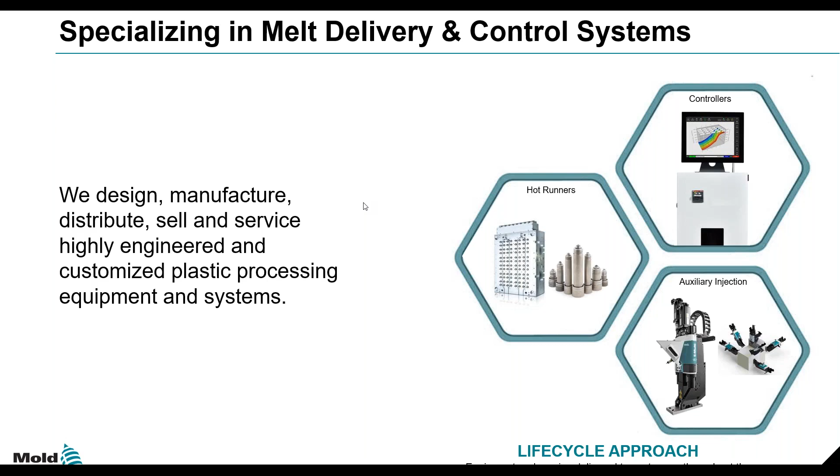So a little bit about MoldMasters and what we do. We design and manufacture hot runner systems - that's our core principal business. Associated with the hot runner systems are, of course, temperature controllers. We also provide auxiliary injection units, which we call an e-Multi.

MoldMasters global presence: we were founded over 50 years ago, 1963 to be exact. We do business in approximately 100 countries globally. We have over 2,000 employees. On a daily basis, we manufacture over 500 nozzles. MoldMasters has always been very strong in terms of our intellectual property and our technology and developing new technologies, and today we have over 900 patents associated with hot runner systems and hot runner technology.

Over the years, we've done many applications - 150,000 different molding applications. Globally, we have 4 manufacturing locations. They're located in Canada, China, Germany, and the UK. Globally, we have 15 service centers with 140 global field service technicians to support our customers.

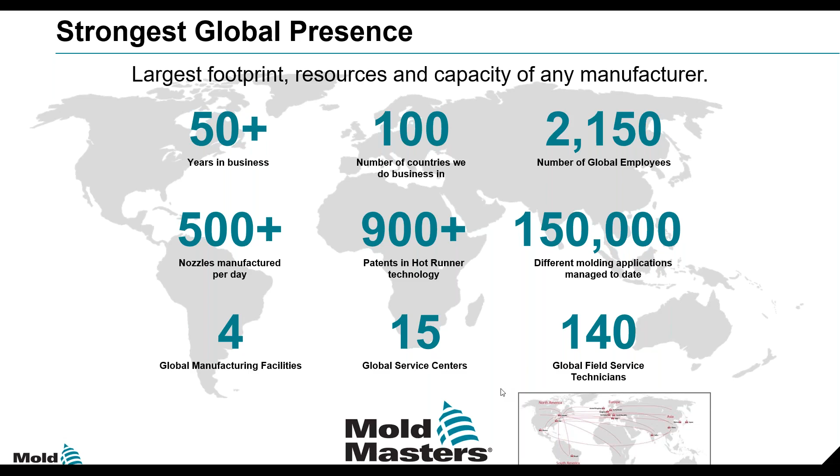So what is a hot runner system? Hot runner technology was introduced over 50 years ago and really revolutionized the whole injection molding process. A hot runner system conveys molten plastic from the machine nozzle and has a system of melt channels that are thermally controlled by electrical heaters and thermocouples to deliver the melt, the plastic, to various different cavities. Today's molds can have 1 cavity or up to 192 nozzles, depending on the parts being manufactured, their size, materials, etc.

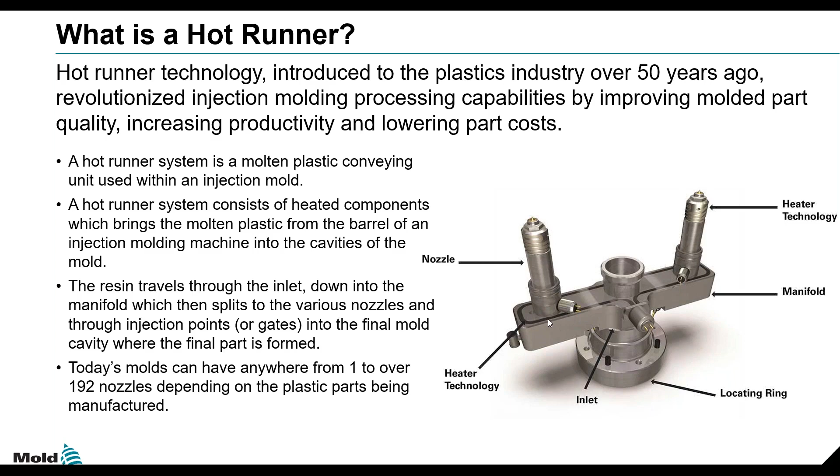This image here just shows you a very simple 2-drop or 2-cavity, 2-nozzle hot runner system. Some of the components that we can see are the inlet pointing down to the floor here, and then we have 2 nozzles that will feed the plastic into the cavities. The plastic comes in and goes through a manifold and then enters into the nozzles to feed the cavities.

So the hot runner system is going to be integrated into the mold, and the hot runner system is customized to match that mold design. Then the mold with the hot runner system is installed into the injection molding machine. Along with the hot runner system, there will be a controller, a temperature controller, and that controller may also include some auxiliary control as well.

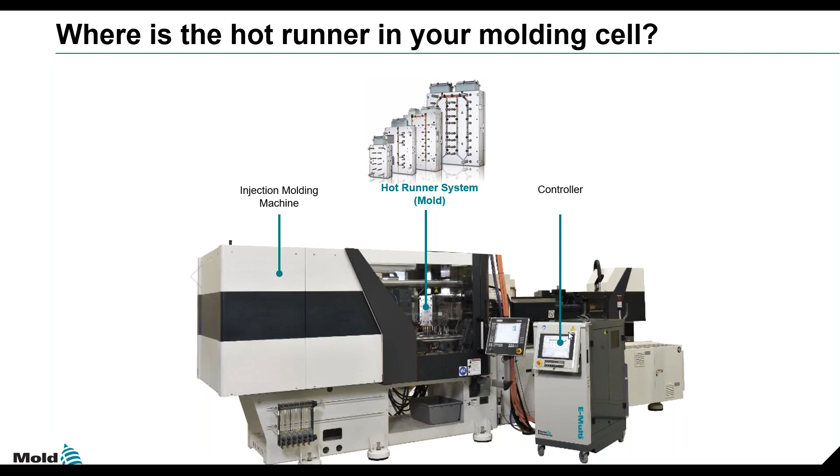So, hot runners versus cold runners. Hot runners came into being - MoldMasters, as we say, were founded over 50 years ago. The oil crisis of the 1970s really promoted hot runner systems. People were being more careful about the energy they were using, and more careful with the use of petrochemically derived products so that they weren't disposing of plastics as easily. Some of the benefits they were able to achieve out of hot runner systems were faster cycle times and less waste.

Here you can see a cold runner, and this cold runner has to be cut away from the molded parts. This plastic may, in some applications, be reprocessed; in other applications, it may have been thrown out in the past. So the hot runner system will eliminate this cold runner and automatically provide parts that are detached, with no cold runner attached to them. It's a degree of automation being built into the mold.

It consumes less energy, requires less capital equipment. You don't need regrind - regrind is always a variable in your process if you're using it. If you eliminate that, then you have a more robust process. It's highly automated, a degree of automation, and it improves part quality - 100% virgin material being used, with better process control.

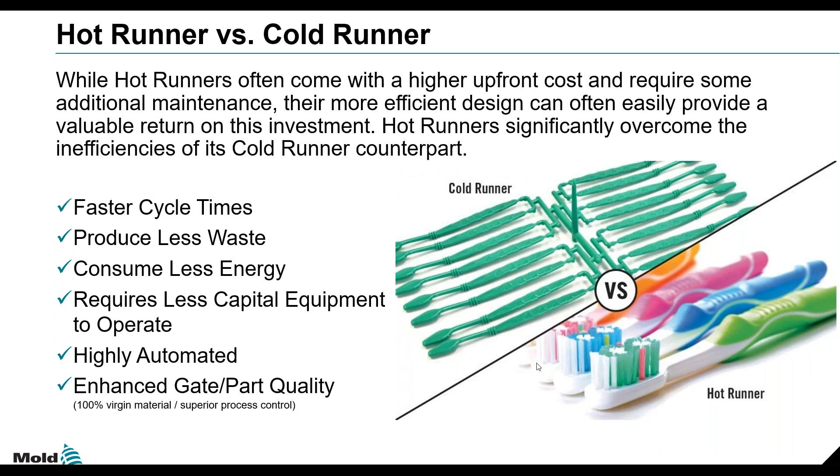Today, MoldMasters serves a variety of different industries. Up in the top here, we're showing the different industries that we serve, providing consumer goods, electronics, medical, personal care, technical components, caps, closures, packaging, white goods, and automotive.

To serve each of those, we have a variety of products. I'm not going to go down through the list, but these consist of different hot runner systems that are specifically geared towards certain applications and certain projects. So we can help select the most appropriate hot runner product based on the application.

We have advanced gating methods, including our AccuValve and others. A valve gate will have a valve pin that needs to be actuated to open and close the gate, so we have mechanisms to control that, to help manage that process.

We mentioned earlier temperature controllers. So we have a variety of temperature controllers, and we'll explain a few of those today. Depending on the number of zones, the size of the mold, there are other features as well that can be included into the temperature controller.

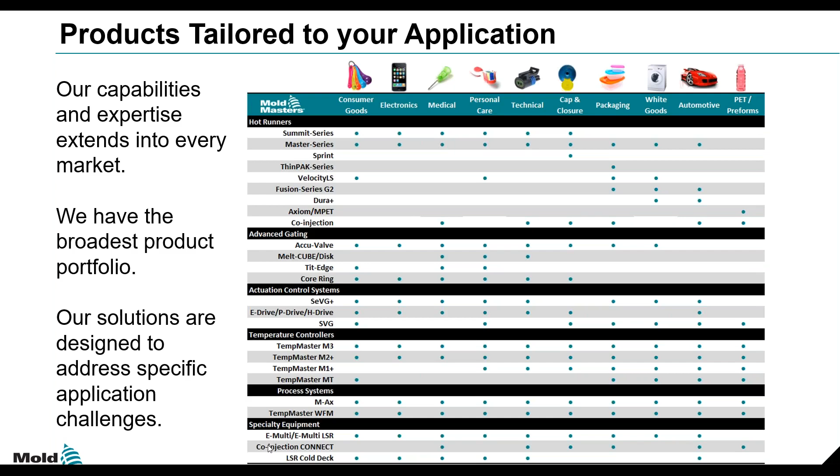We have other specialty equipment. I mentioned the EMulti, our injection unit, and we also have a co-injection process and product.

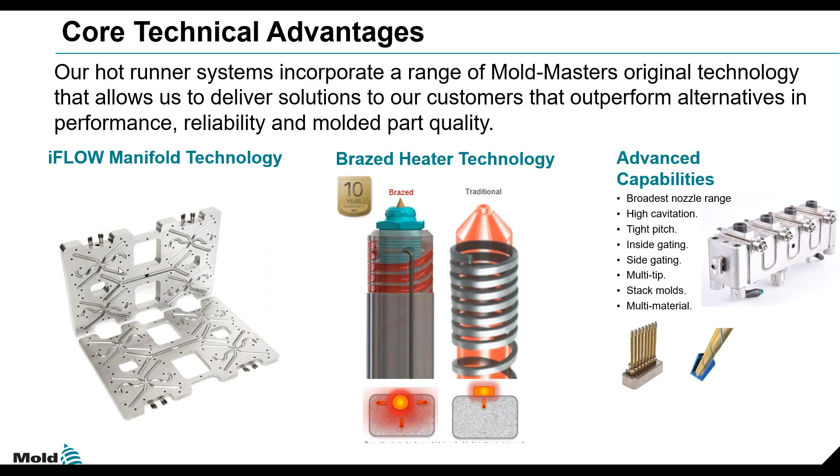Some of our core technologies: our IFlow Manifold technology is a technique that we use to manufacture manifolds. Our heater brazing is a core product or core feature of MoldMasters hot runner systems. And then we have advanced capabilities for different types of applications - high cavitation, tight pitch where nozzles are very closely positioned, stack molds, multi-material - a whole range of more advanced technologies using hot runner systems.

The core technology is the brazed heating technology. So when we build a hot runner system or a nozzle, that heater is being brazed into the nozzle. What that means is several things. One is that when heat is generated in that heater element, it's immediately being transferred into the thing it's trying to heat up - it's metallurgically fused to the nozzle, it's a part of it.

When we put a heater onto a nozzle, every nozzle that we make is going to have the same heater in exactly the same position, which gives us consistency of performance from drop to drop. By brazing that heater in there and ensuring that heat is being drawn away from that heater, what that does is it extends the life of the heater. So it's very unusual for a MoldMasters nozzle to burn out - not impossible, but very unusual, a much lower incidence than conventional heaters that are not brazed into position.

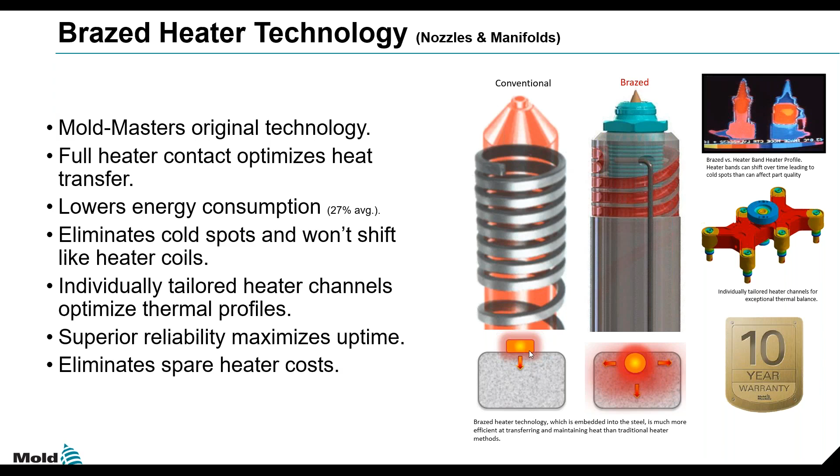Our IFlow Manifold is a MoldMasters technology that has been around for over 30 years. The concept is that we take two pieces of steel and mill the pattern that we want the plastic to flow through - we mill it into the surfaces on the two faces of that manifold. Then we braze them together, again metallurgically fusing those two pieces together, very accurately aligned.

So we can put in different runner geometry. We can also select the sizes of the runners and change them at different locations as we wish. We're not limited by a gun drill drilling in a straight line, so this gives us tremendous flexibility with many benefits in processing.

Again, those manifolds are going to have heaters brazed into them so that you have long life and flexibility from a design perspective - we can position those heaters where we need to in order to achieve the optimum thermal profile within our manifolds.

The IFlow manifold also has features where we can put in different levels. So we have milled features where we mill the runner, but we can also gun drill some channels into that manifold as well. So we have different levels - this manifold that you see here actually has two different levels of runner channels built in.

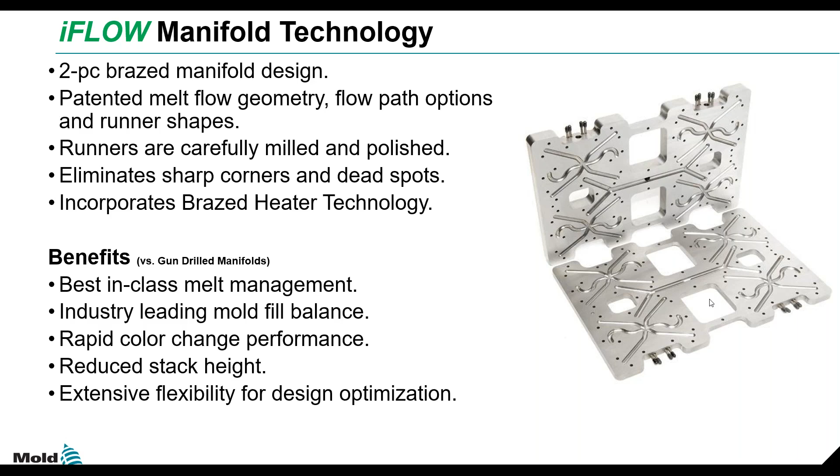Some of the gating methods - open gate versus valve gate. The valve gate is kind of obvious in that mechanically you move a valve pin and you now can flow plastic through the gate. Non-valve gating relies on cooling to close the gate. There are different designs according to the type of gate quality, the type of material being molded, and the gate quality that you want at the end is a major factor.

Some of the gating methods we would have with non-valve gating would be a torpedo gate. Here we see what we call an E-type torpedo. Again, there are different options depending on the desired gate appearance and the material being molded.

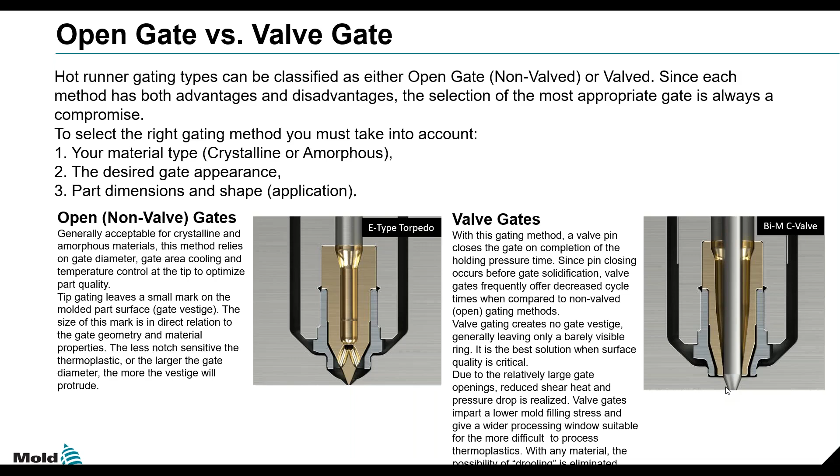Valve gating, we have different options based on part size, based on material being molded, and the quality of gate that is required. Our premium gating method, our premium valve gate, we call AccuValve. AccuValve features different types of gating methods with different benefits, suitable for different applications. Our most common is our AccuValve MX. The AccuValve CX is designed for excellent color change. And our AccuValve GX features a component that actually goes through into the cavity and forms part of the cavity surface.

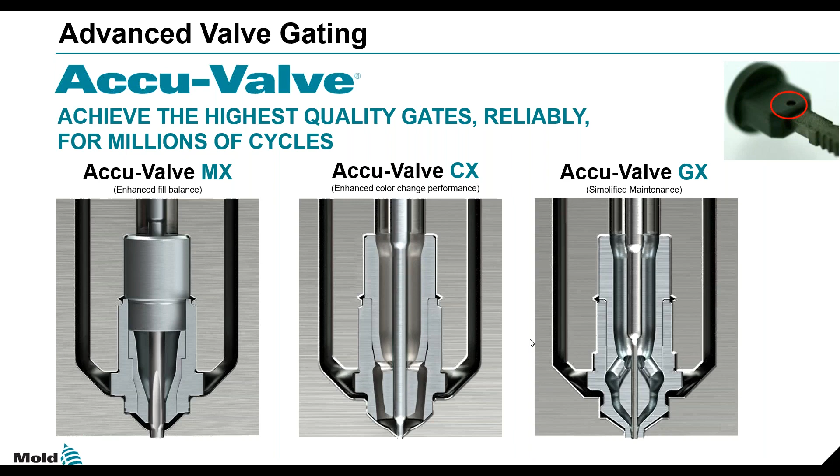In order to achieve the highest quality gates, it requires a fine tolerance between the valve pin and the gate. With these gating methods, the mold maker needs to achieve that tolerance on the gate finish. With the AccuValve GX, MoldMasters takes care of not just the valve pin, but also the finish in the interfacing component, right down into the cavity steel. So it is simplified maintenance, easily replaceable gate steel, and easy integration into the mold.

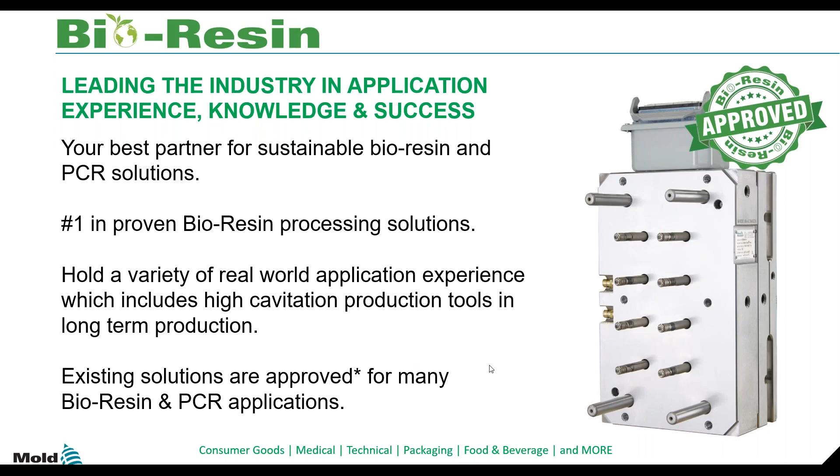Bioresin - we've heard a lot about bioresin. MoldMasters has been making applications for many years, using various different types of material that is more environmentally friendly. Bioresins have had a lot of focus in recent years, and MoldMasters technology lends itself to these types of applications. Some of these materials are more thermally sensitive. They have a narrower process window, and we have systems that are more suited to these types of materials. So we have wide experience on a wide variety of bioresins. That means degradable materials, compostable materials, and PCR, post-consumer regrind or recycled materials, which are reducing the carbon footprint of products and attractive to many applications.

Stack molds - this is one of the more advanced technologies. Over 35 years, we've been supplying systems for stack molds and hot halves for stack molds. One of the questions about a stack mold is how do you get the melt into the center section of the mold? A stack mold is going to have two molding faces. So within the mold, when the mold opens, you have two parting lines. This means that the hot runner system is actually in the center of the mold and moves away. The center section is moving as the mold opens. So we have different techniques to get the plastic from the machine nozzle into the hot runner system.

The most common is the sprue bar, which we show here. We also have another feature, another type of design, which we call a valve-to-valve. What the valve-to-valve does is it eliminates this sprue bar. So when the mold opens, you don't have an obstruction going across the first parting line. Instead, you have two valve gates that feed into each other. You open up, you shut off between each face of the valves, and you pass plastic across the parting line, then close the gates, one closing into the other. So when the mold opens, you have a fully clear opening.

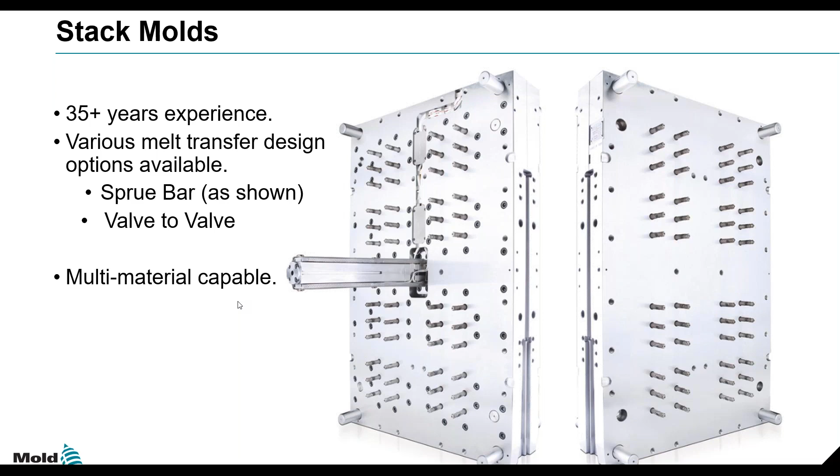Multi-material capability - we make systems that use different materials. Injection molding one material onto one face, and then a rotation may occur within the mold, or a mechanism may open up a different cavity in the mold. So you make a part that has two different materials, one molded on top of the other. And doing that in a stack mold makes it even more complex.

Another advanced feature is side gating. We have different options for side gating. One is our melt cube EVO. Here we see a melt cube, and on the side of it we can see the feed points that are going to feed into the cavities. The cavities are positioned so the mold can open and close, and the part is fed in on the side. Here we have another 4 cavities on the other side, so you're getting multiple cavities aligned in rows for simplicity and for getting more density into the mold, more cavities for a given mold space.

Our melt cube is similar, except now the tip is angled at a slight angle. So if you don't have an exact vertical wall, or another feature that you want to mold a gate into, we can accommodate that. What you don't see here are all the runners built in so we have a balanced flow path to each gate. If you want more detail on this product, search MoldMasters on YouTube and you'll see a variety of videos that go into this type of technology in more detail.

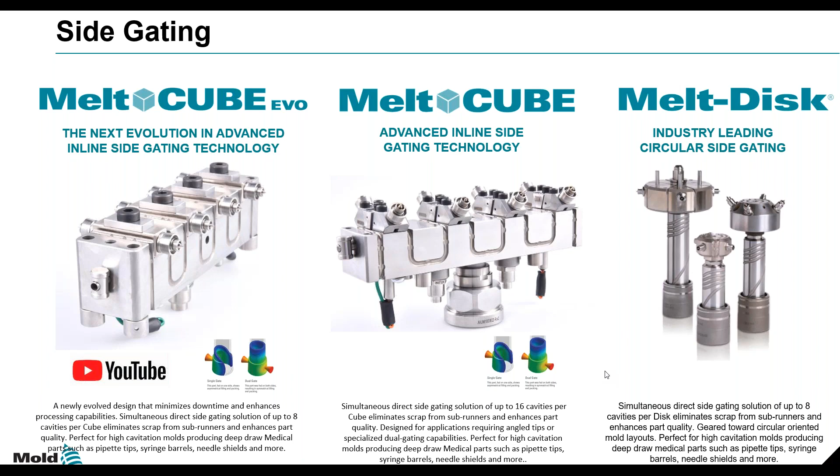So these are what we call more advanced technologies. We would be very pleased to review any applications, though some thought needs to go into assessing the application and verifying that it's valid and suitable for this type of gating method. We'd be happy to review any applications where that might be considered.

Specialized dual gate design: we have a special melt cube that allows us to gate into a part on both sides. Here we can see a part, and we're gating in from two sides. The reason we want to do that is to reduce the possibility of core deflection. If we're making a part and gate it into one side, the plastic has to flow around the core pin, and as it flows up along the core, it goes up faster on one side than the other. That's a problem if this core pin is not...

located at the open end. If you have an open end in the part, parts like blood vials, you can't shut off on the top of the core pin. So if your plastic is moving up on one side, you may cause that core pin to deflect and get pushed over. If you were doing it with a cold runner, you'd make the cold runner come in on both sides of the cavity. So how do you do that with a hot runner system? What we do is we come in and feed from two different sides.

Let me go back a slide. Here, the secret in how we do it is we have two inlets into each of these melt cubes. One inlet would feed in - we're looking at it from the parting line side here - but on the other side, plastic is being fed in at this location and distributed to give uniform flow to each of these four cavities. We will have another inlet here that would feed into these four cavities. So if we had 8 cavities, here we just show 4, but if we had another 4 cavities, we would use 3 of these melt cubes.

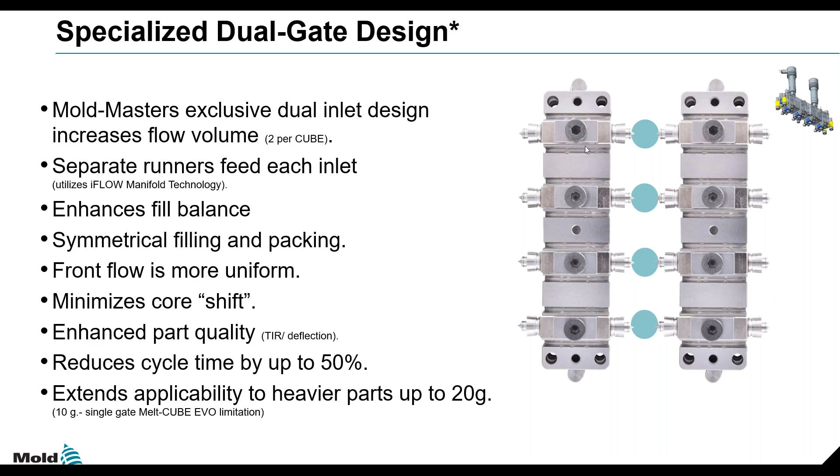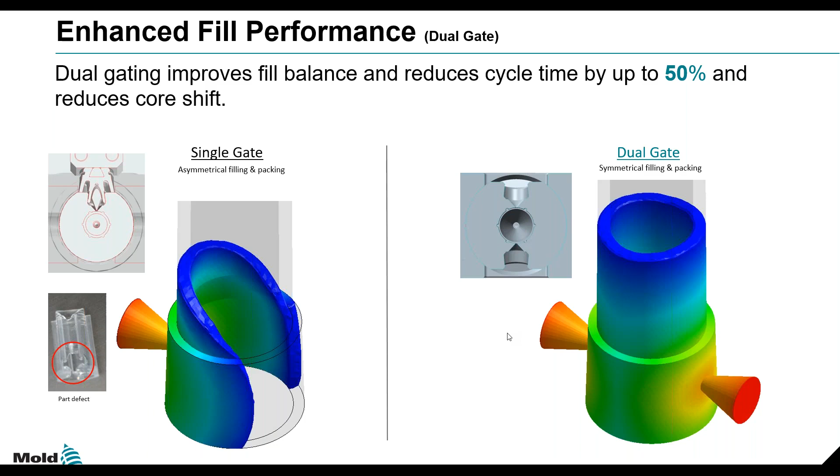That gives us identical balance and solves the problem of how we feed in from both sides. That gives us excellent balance, excellent control of filling, and that translates into straightness on parts such as pipettes, where straightness is a critical concern.

At the beginning of the introduction, we saw a reference to a Mold-Masters hot runner system that Plastek uses. This is what we call a Tit-Edge system, and here we see 2 gates. Here's how this gating method actually operates: we're going to gate into the side of the part that we see here. On the left-hand side, we can see an example of the gate witness.

So there is a witness mark where this gate is positioned, feeding into the side of the part. Here we generate a cold slug. As the mold opens, it takes the part away, it degates, cuts this off with a clean gate appearance. And then on the next cycle, we push in that cold slug, we remelt it, and we allow the part to fill. So we have a fully automatic degating process, good gate quality, and no moving parts other than the mold, of course.

We don't have any shut-off mechanism in here. This is all controlled thermally. This gives us excellent color change, excellent balance, and that is the gating method being used. And the system that Doug showed has 36 nozzles, so it's a 72 cavity mold.

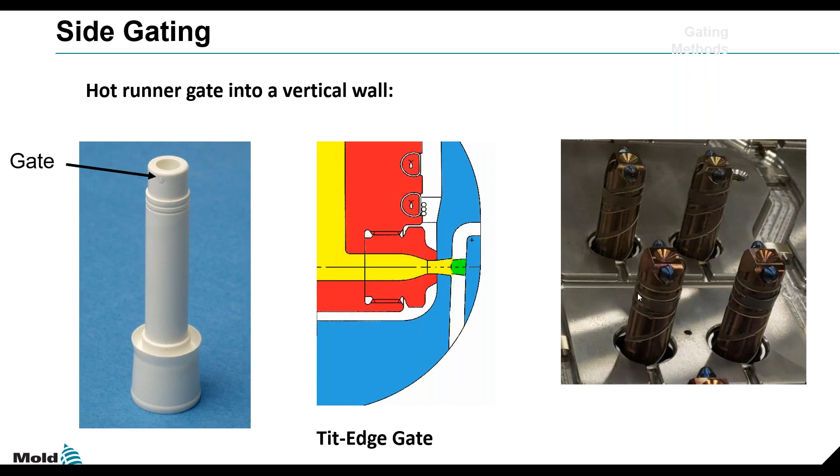Sequential gating will be used where we want to control, we're not going to open all the gates at the same time and fill simultaneously. If I have a large part with multiple gates, I open all those gates and start filling. The flow front between two gates is going to meet in the middle, and you're going to see a witness mark on the molded part.

What sequential valve gating does is it allows us to control the opening time, the opening position of the pin. So you don't open them all at the same time. So if you wanted to move the weld line or knit line in one direction, you open up one gate first, and then slightly later, you open up the second gate. So you can control the position of that knit line between the two gates.

If you have a large part and you want to avoid witness lines between gates, you open one gate and take the flow front past the second gate. After it is past the second gate, you open up that second gate and now push that flow front further along, perhaps to another gate. So sequential valve gating can help to eliminate witness lines or knit lines, or at least help you to position them to where you want them, to less objectionable positions.

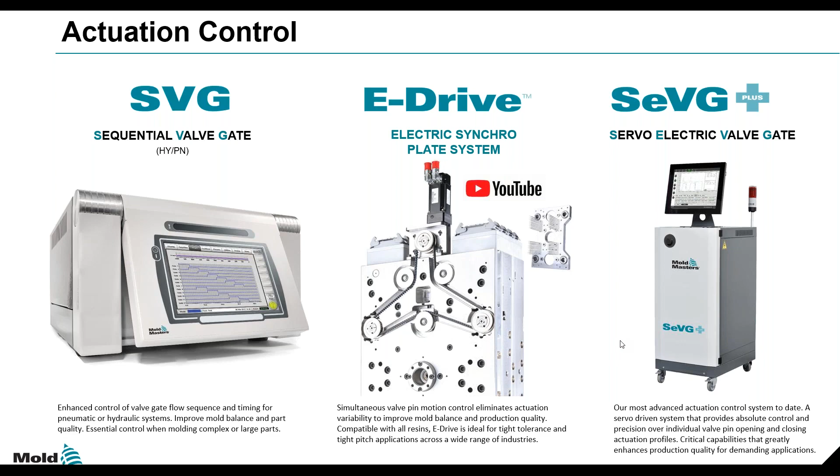Again, this can be combined with the sequential mechanism to control the timing of the valve gates. Servo control gives us control not just of the time when we're going to open the gate, but also the position of the pin as the pin opens. We can control its position, and that can influence the gate quality and appearance of the gate. We can also control the speed that the pin is closing, for example. And again, this can have an influence on the quality of the molded parts.

So the E-Drive, this is an example showing quite a large mold. It also features our manifold technology. So this mold is an 80 cavity mold. So that's a little bit unusual. Here we have a servo motor that drives this belt around these ball screws and idler pulleys, so that we have a plate in there that is going to move up and down to open and close the gates.

So here we see this plate. So we can position the pins nice and close together on this plate. So our cavities, we're getting more cavities out of the mold. But you're not going to be able to get individual actuators to move these pins. So we put them onto this plate.

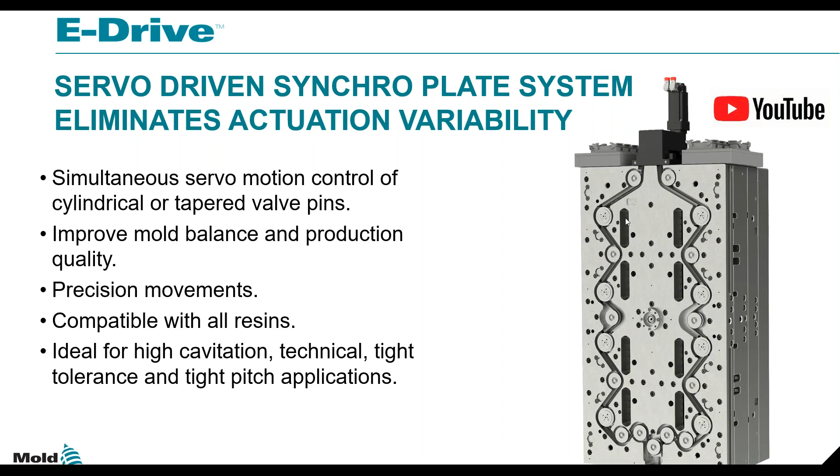And here we have, this is half of the mold, so we have 40 of these pins on this mold. And actually these slots allow you to access those pins within the mold. So if you damage a pin, you don't have to take apart the whole mold. You can gain access to it from the back. So this plate, this actuation gives us very uniform movement of all the pins all together, which helps with part fill and balance.

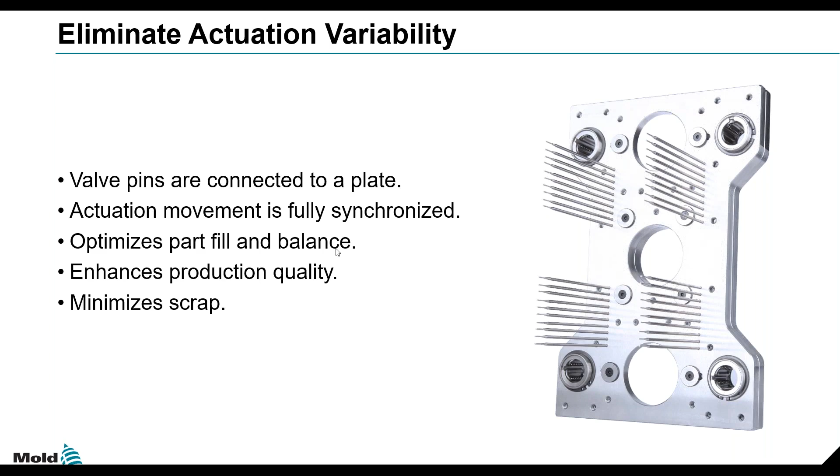So what happens if we damage a cavity? I've got an 80 cavity mold, a big mold, and I've got a cavity that is dimensionally incorrect, or I've damaged the cavity. Can I shut off, or how do I shut off one cavity?

This is a mechanism that we refer to as our Mag-Pin technology. The servo plate contains this mechanism with the valve pins.

In order to shut off a cavity, we don't stop molding, we drop the temperature in the cavity we want to shut off. As the temperature of the material in the nozzle drops, the plastic solidifies and holds onto that valve pin. Now, if we actuate the valve pin, the plate moves, but here we have a magnet feature that lets go of this valve pin holder.

So this plate can still move up and down, but this pin is not going to move because we've dropped the temperature on that nozzle. That is the Mag-Pin technology. When I want to get this pin to move again, I just turn back on that nozzle, and now this magnet will pull the pin up and down. All the pins each have their own individual magnet, so any individual cavity can be deactivated just by dropping the temperature on that drop location.

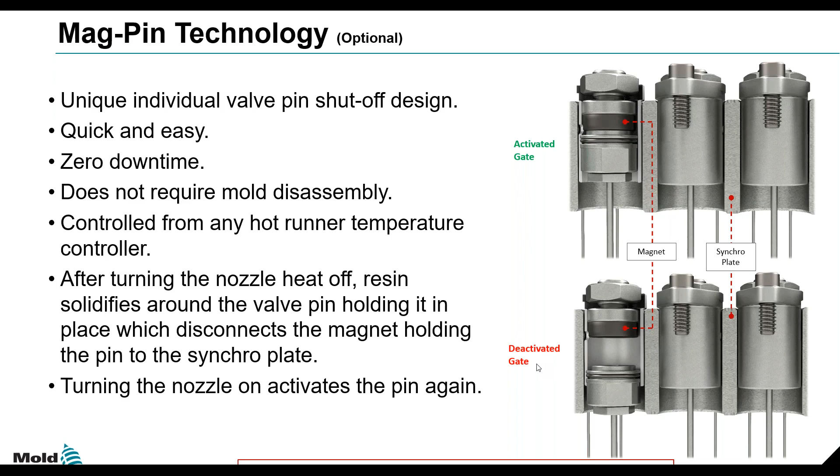SeVG Plus, this is our Servo Electric valve gate. This is a servo-driven system, giving us absolute precise control over individual gates. It allows us to individually adjust each valve pin, so we can change our stroke, we can change our speed. In a family mold, you may require different features on different parts, different timing of opening of different pins, so this gives you tremendous flexibility across the mold.

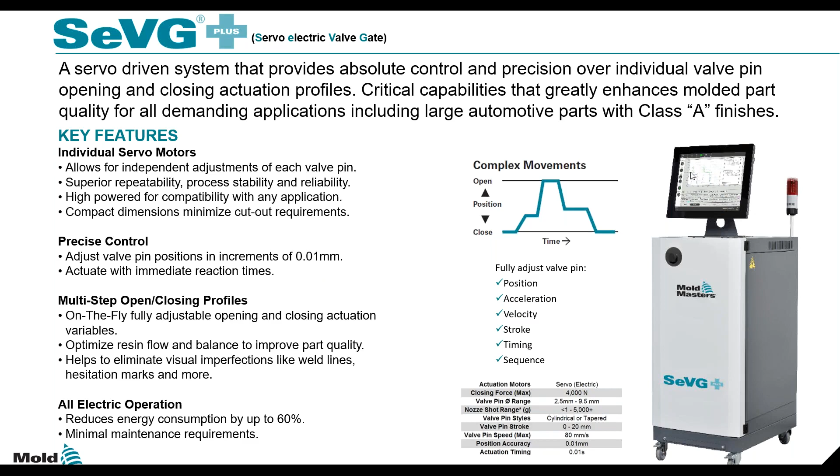You can adjust the valve pin positions in increments of 0.01 millimeters and make adjustments on the fly with this. The screen is easy to use and very user-friendly.

The servo motors have traditionally been a challenge because of their size. This is something we've been working on, and MoldMasters has introduced a new servo motor that is 48% smaller stack height than conventional servo motors. The footprint, the size of it otherwise, is about the same size as a standard hydraulic cylinder, so just over 4 inches square. But the stack height has been reduced by 48% and still incorporates water cooling channels that are necessary to maintain the temperature of the servo motor.

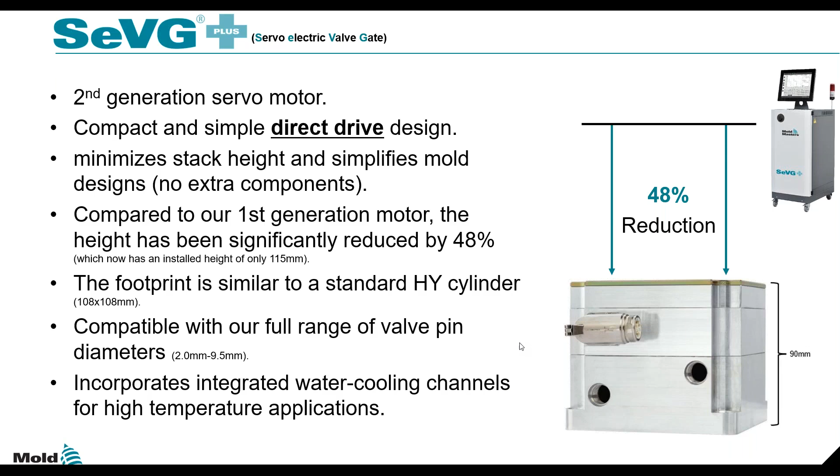Temperature controllers. MoldMasters offers a range of temperature controllers depending on the size of your molds and the number of zones that you're going to need.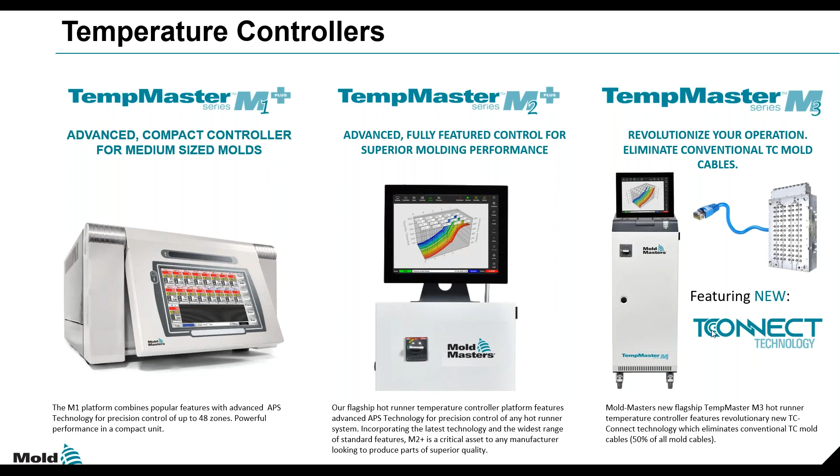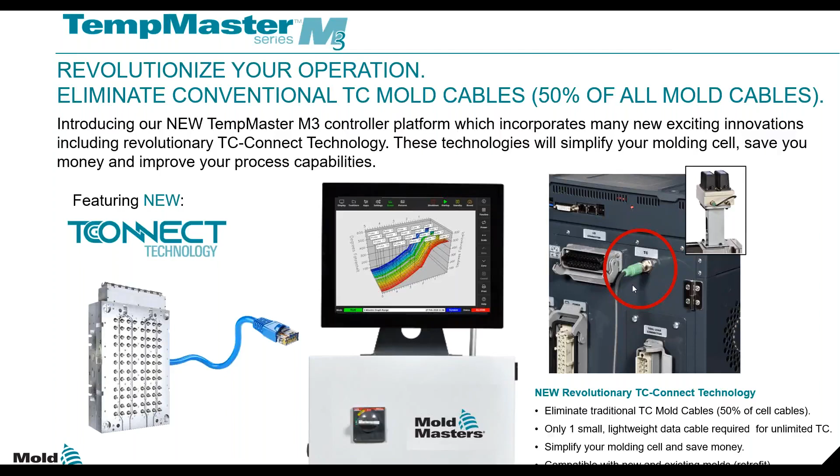We're excited to introduce the TC Connect. TC Connect eliminates thermocouple cables. If you look at a high cavity mold and look at the size of the cables going up to take power to that hot runner system and to take all the thermocouple leads back down to the temperature controller, we've eliminated the thermocouple cables. You don't need them anymore. Instead, you have just a single wire like a LAN wire. So the wiring goes into the box on top of the mold, and this simple cable talks to the temperature controller and gives you the same control as you would have conventionally.

Some process control features that we offer: water flow monitoring. Water flow is quite often overlooked in processing. We can outfit your mold so that we monitor the temperature and flow rate of each circuit.

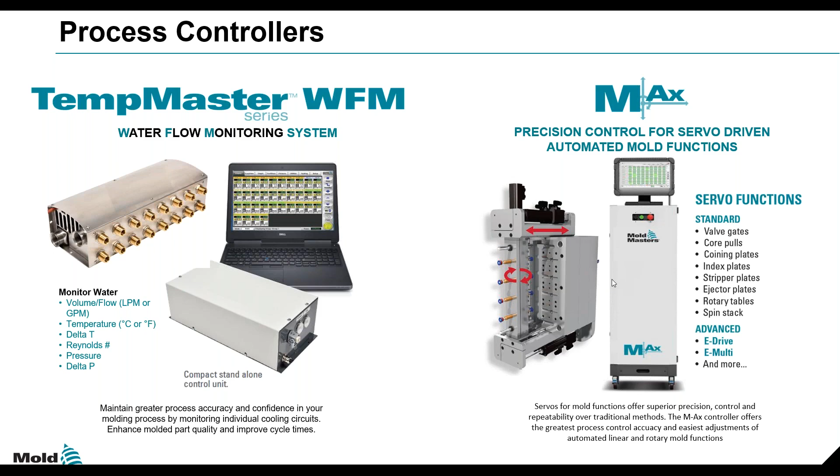M-Ax controller: if we have a valve gate using servo motors, we have a controller for that, but we can also extend control to look after mold features. A servo motor may be used as part of the mold design for other things besides the hot runner system.

Many customers were building two-shot molds, so squirt one plastic and then move something in the mold and put another shot over it. Toothbrushes are a classic example. To facilitate that, we developed the EMulti, which is a bolt-on injection unit. So you have a conventional injection molding machine, and you can get an EMulti system, in a variety of different sizes according to the shot size you need, and you mount it where you need it.

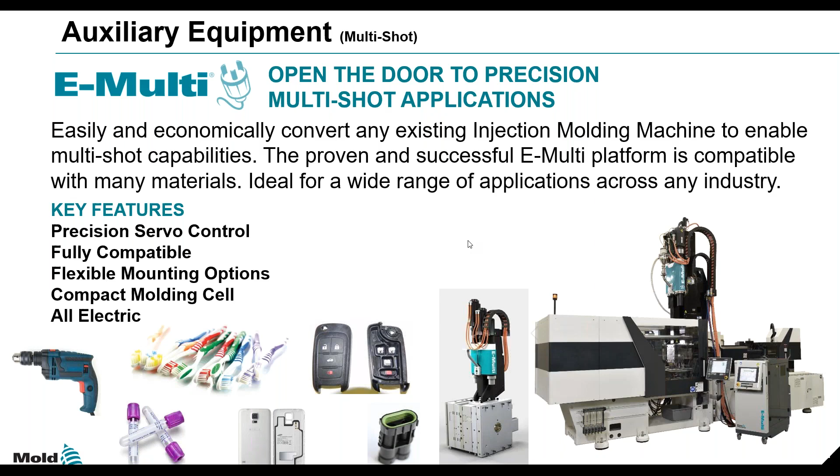You can put it up on top of the mold, as we show here, going vertically into the mold. You can have it piggyback over the existing injection unit. You can have it on the non-operator side or at an angle. You get creative as to how they're mounted. This means you can convert a single shot machine to a two-shot machine, and when that project is finished, you can unbolt it and put it onto a different machine. Tremendous flexibility.

Fusion G2, this is a different design of hot runner system, intended for larger parts, very popular in the automotive industry. And what you see there is what you get - it's pre-wired, all the electrical things done. What's different about it is that the nozzles screw into the manifold, so the nozzles are mounted on the manifold and can be dropped in as a complete assembly.

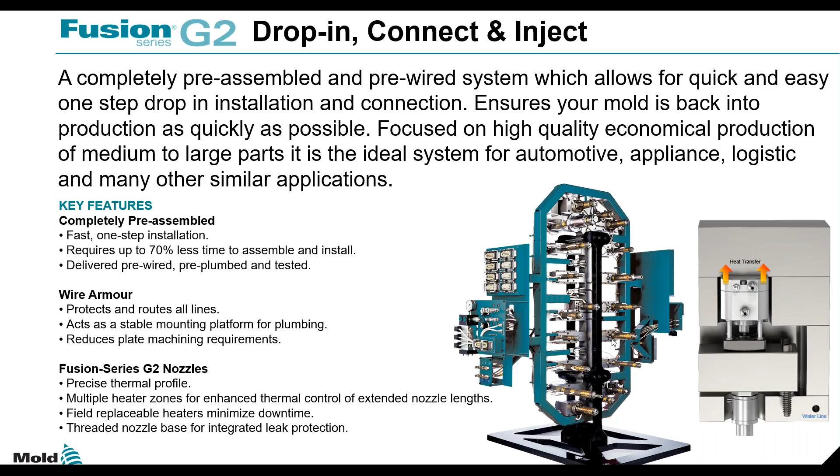Co-injection is slightly different from bi-injection, or multi-material molding. Co-injection is where you inject two materials through the same gate at the same time, and what that does is it puts a core layer in between.

That core layer may be used to prevent oxygen permeability going through a package and extending shelf life of a product. Or it may be used on thicker parts, where you want to get some post-consumer material into the center core to reduce the cost of your material, while having nice white virgin material on the outside of the part.

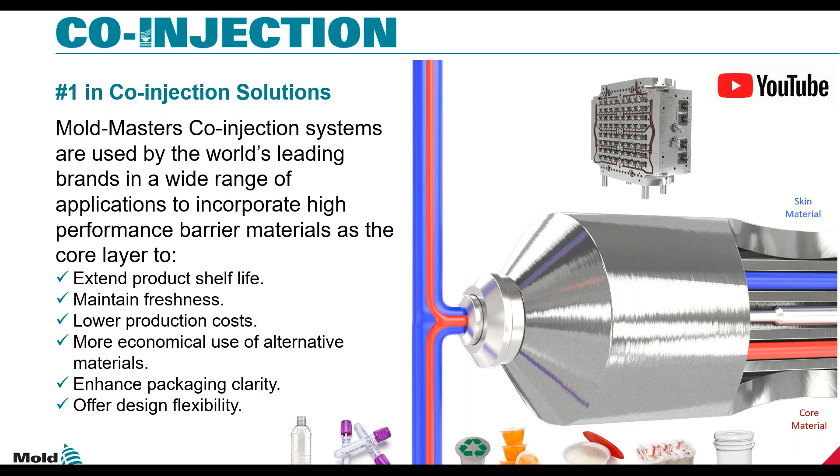So that's our co-injection system as well. And that's a quick overview of our MoldMasters technology. I'll pass it back to Nicole.